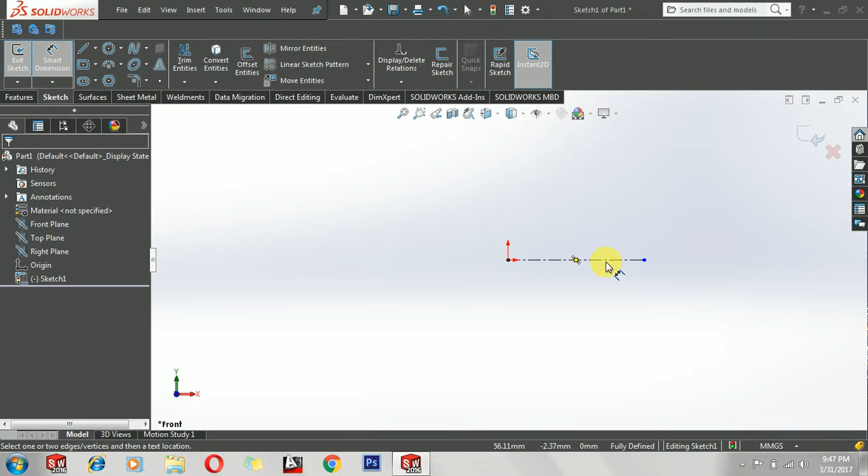फिलहाल वॉल्यूम चेक हो जाएगी। तो माउस के लिए सबसे पहले हम अपनी बेस प्रोफाइल बनाएंगे। बेस प्रोफाइल की बेसिक डायमेंशन हमने ले रखी है। बेस लेंथ 90 मिलीमीटर के अप्रॉक्स है, जो डेल का माउस है उसके हिसाब से। माउस के नीचे के बेस के लिए हम स्प्लाइन कंसीडर कर रहे हैं।

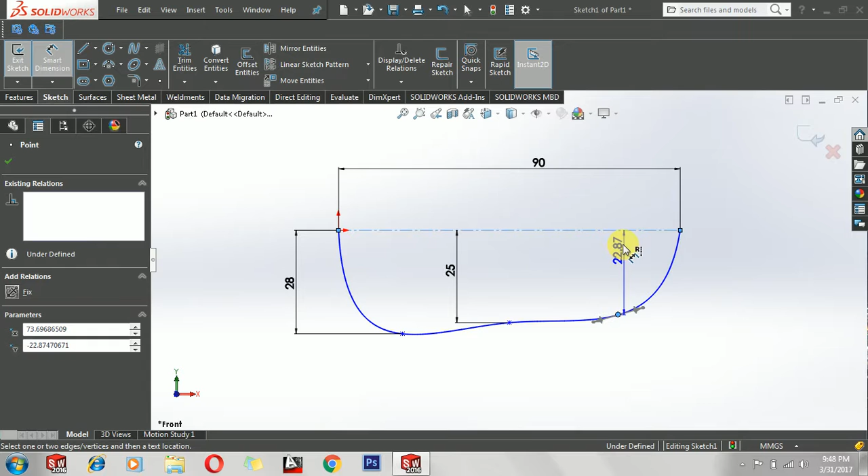स्प्लाइन 5 पॉइंट स्प्लाइन हमने बनाई। स्टार्ट पॉइंट यहाँ फिक्स था, एंड पॉइंट इसके एंड पे फिक्स था। मिड पॉइंट्स को कॉन्फाइन करना है, कंस्ट्रेन करने के लिए डायमेंशनिंग कर रहे हैं। आउटर मैक्सिमम 28 दिया। मिडिल पोर्शन से थोड़ा अंदर की तरफ डिक्लिनेशन है, उसके लिए 25 सेट कर दिया। एक्सटीरियर बिल्कुल अंदर की तरफ डंप हुआ है, वो भी सेट कर दिया।

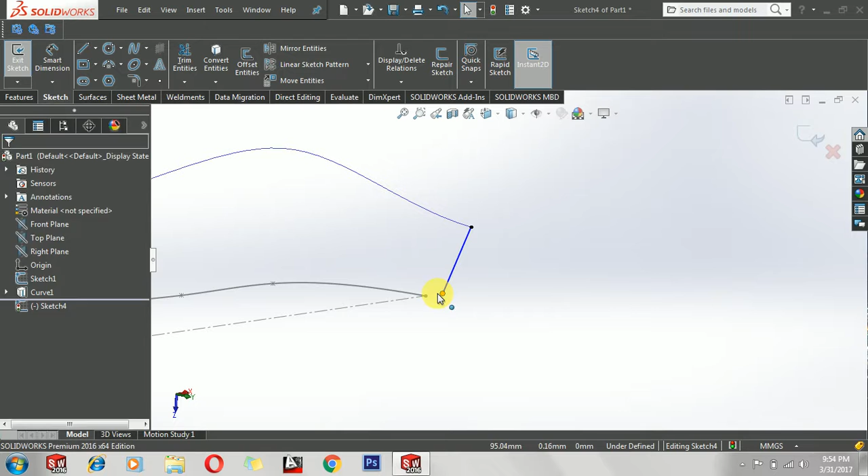अगर हम माउस को देखें, तो हम देख सकते हैं कि ये लाइनें किसी कर्वेचर पर हैं। इसके लिए, मैं इन दोनों लाइनों को प्रेस करके इन्हें अपने डिजायर्ड गाइड कर्व्स में कन्वर्ट कर रहा हूँ।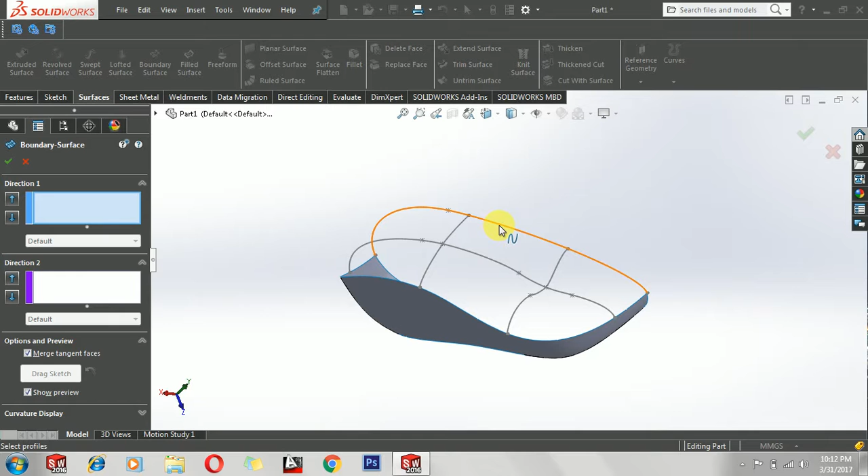I am applying direction 1. This sketch should be compiled with this sketch, and this profile compiled with this profile in the second direction. Trim with direction 1 and trim with direction 2 will result in this kind of shape.

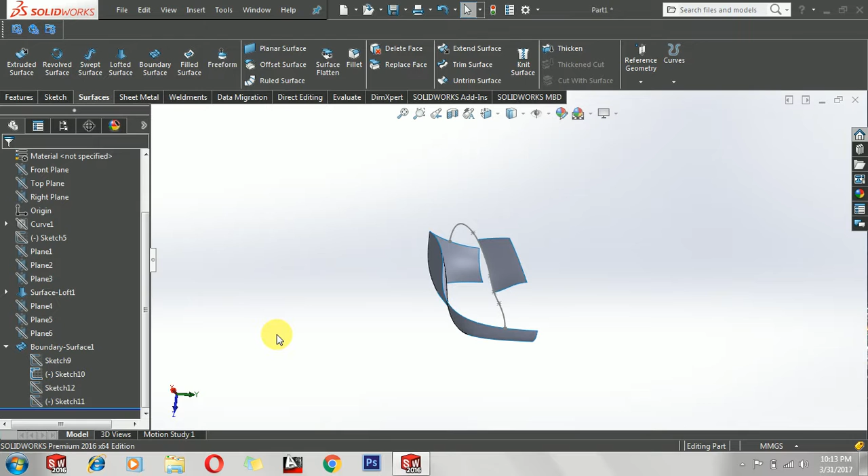Again go to boundary surface and we will apply boundary direction 1 from here to here, and in direction 2 we will apply this as first direction and this as second direction, and along this direction we will apply trim. Then first profile, sketch first, none, okay, none, and none.

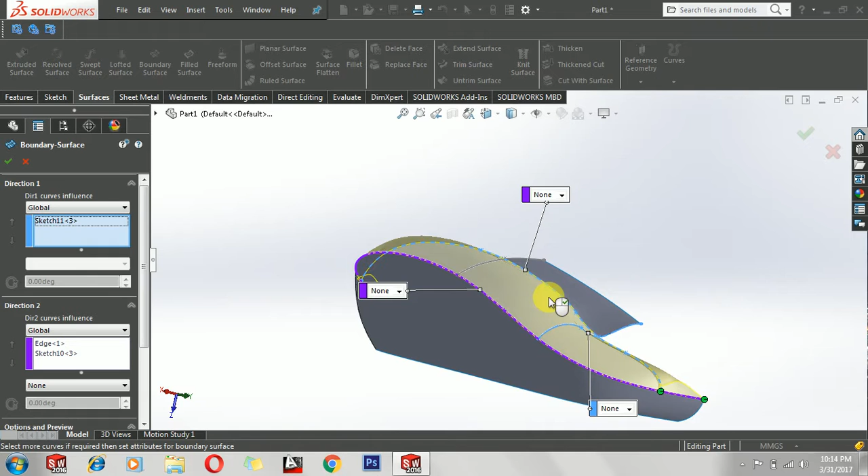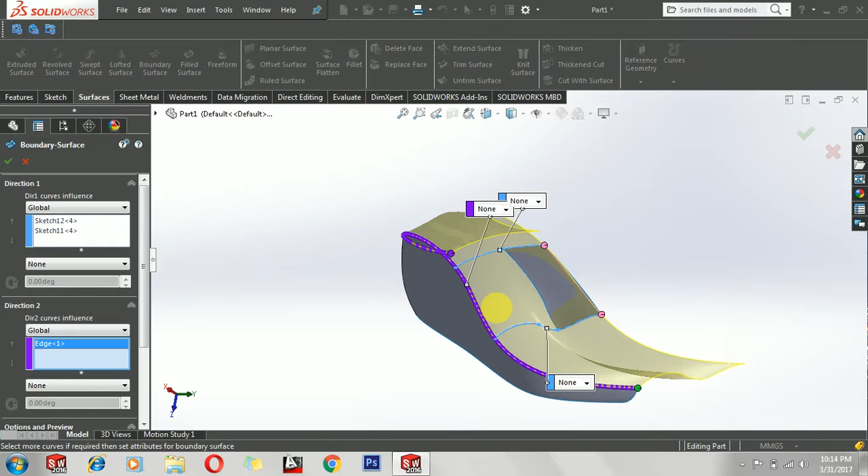Boundary, this to this direction, this and this.

That's perfect, fine. Perfectly fine. Okay.

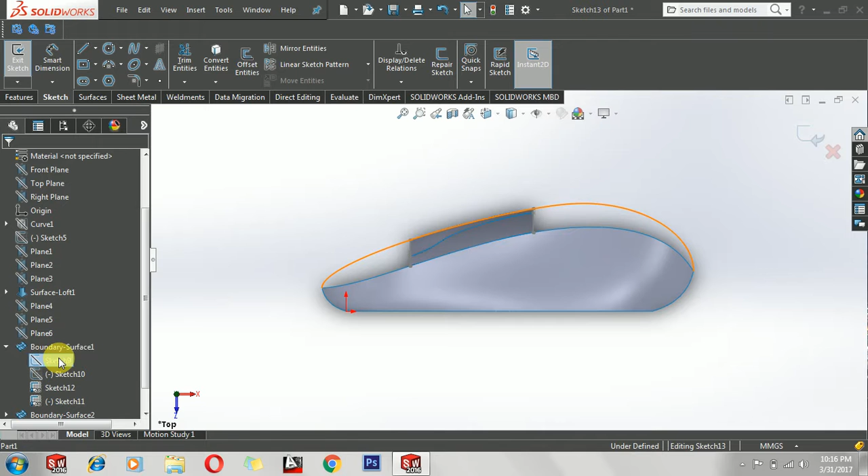Now we'll go to top plane again. Sketch. Then convert the sketch. Go to trim. This. Yes, with this. No. Exit.

Hide it. No. Again, we'll apply boundary from here. Direction 2, this.

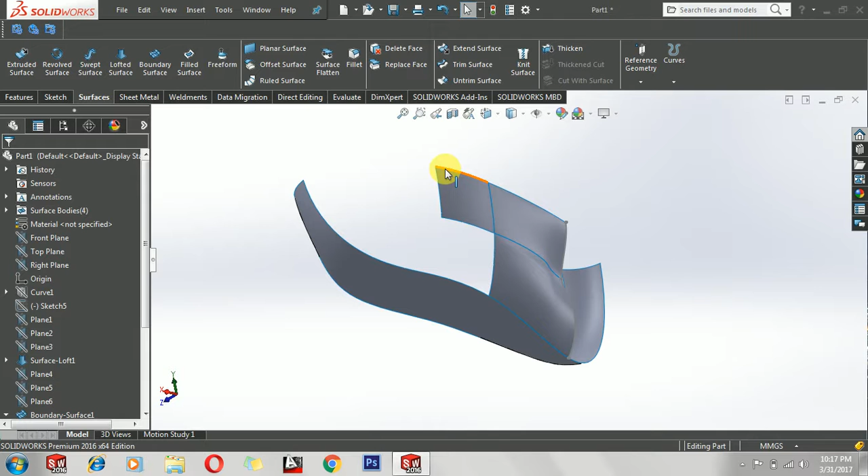No, we need to compile this face. In order to do that, as now here we can see there is a vertex, but now there is no vertex.

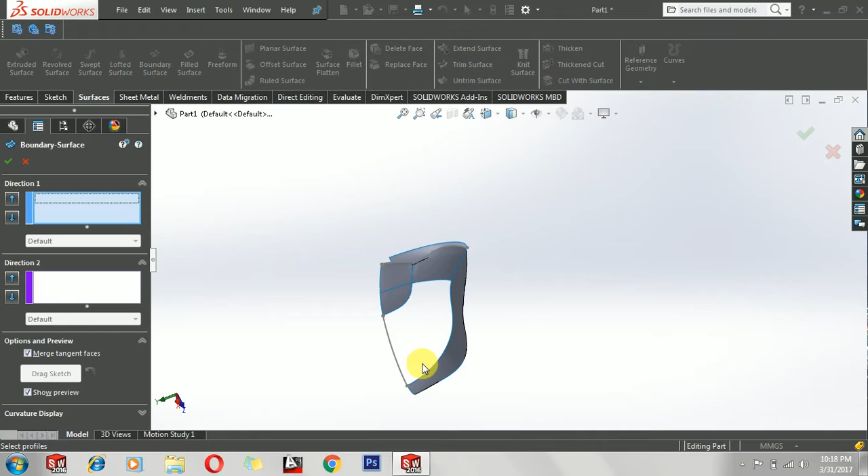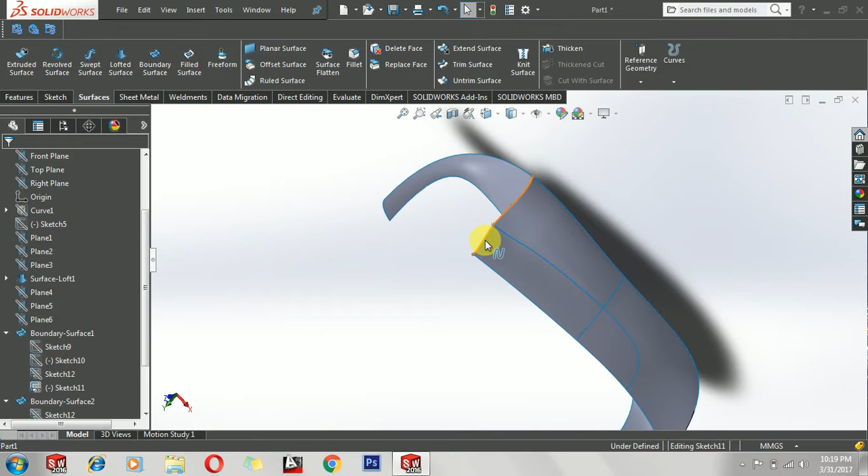Okay, rear profile of mouse is constructed. Now we need to construct the front end of our mouse. In order to do that, what we are going to do is go to front profile and again convert sketch, then trim.

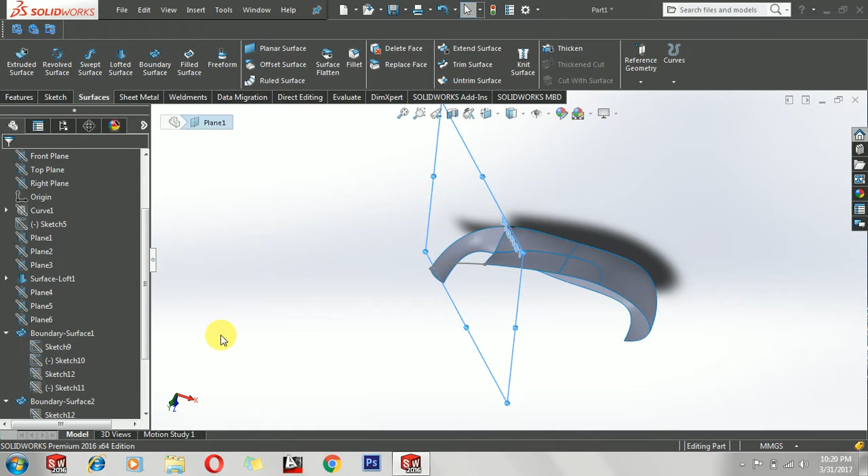Now put a plane for sketch and profile to trim.

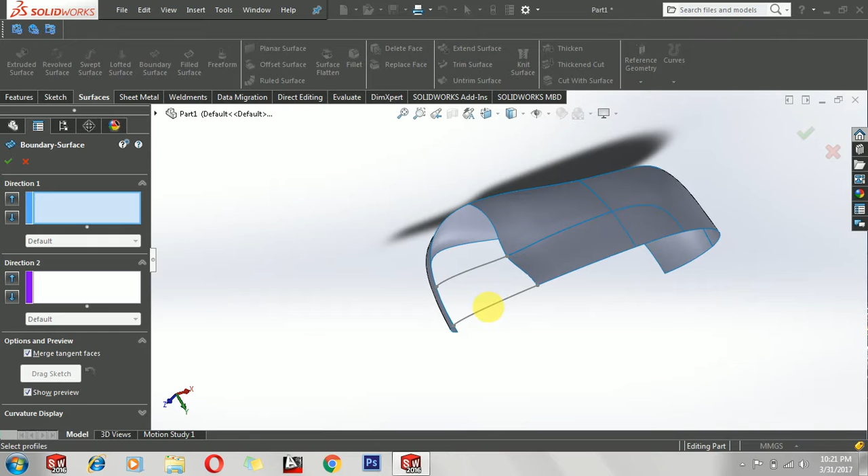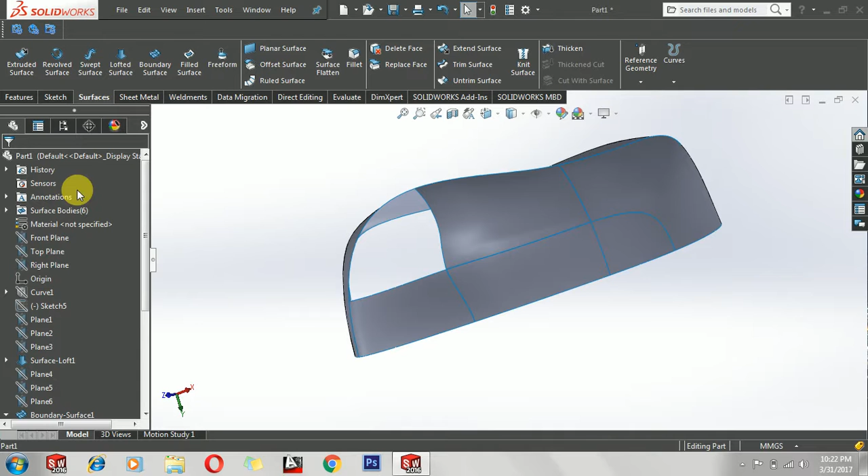Now again we need to fill the area between this, as now we can see that here is a vertex, but for boundary we need to convert this vertex into curvature. In order to do that, what I'm constructing...

Diameter should be approx 15, 20. No.

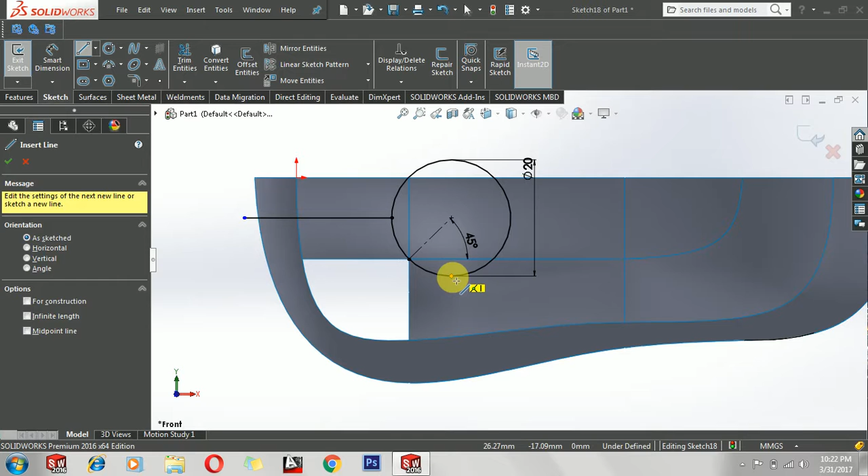No. So we have to trim from this part.

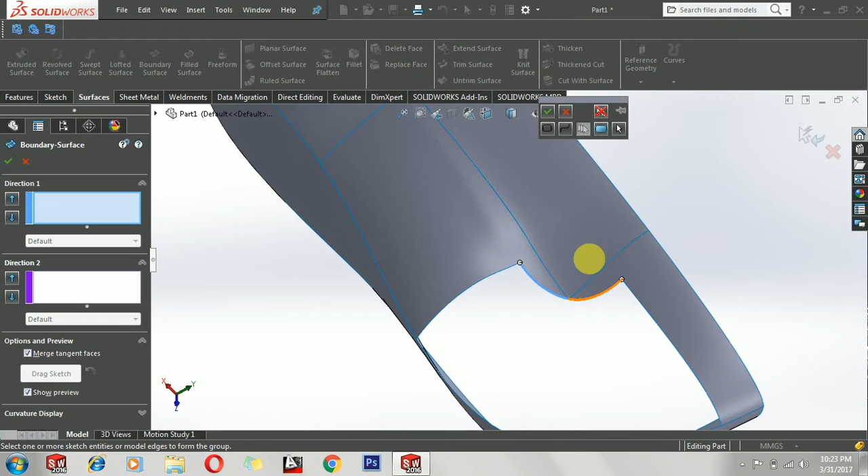Now go to selection manager and go to group selection and then select this whole profile. Okay. Then this profile. Right click. Touch. Click. Flip connector. Now in direction 2, this.

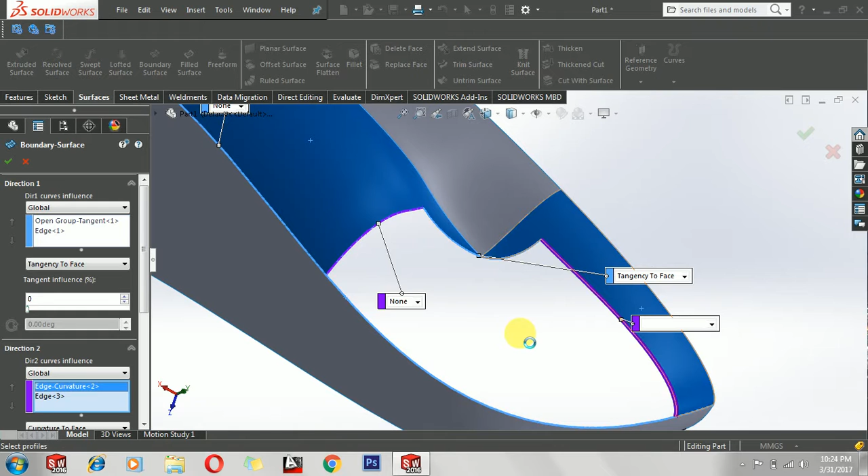Okay, it's compiling now. As you can see, there should be curvature to face. So it should be then tangent to face, curvature to face. This long. Okay.

Now as you can see that the mouse with dent is created nearly.

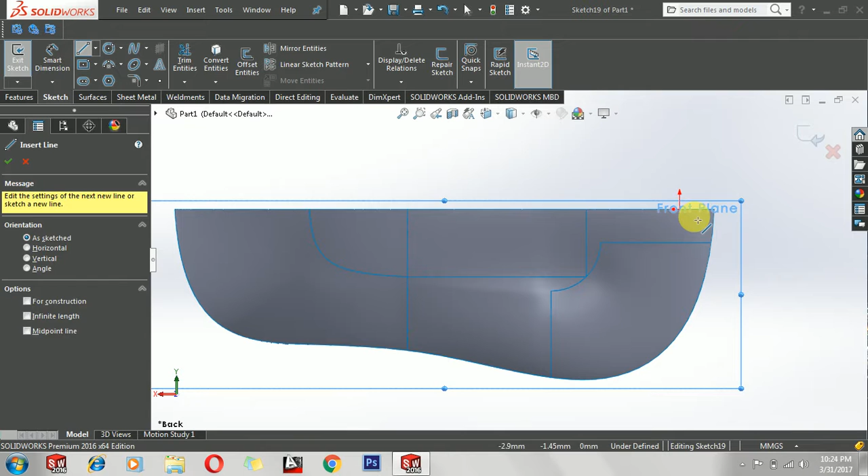Now what we need to do is we need to provide some holes for our scroller so that it can be fit properly. In order to do that, we are doing this.

Coincide. Now gap between these two should be approx 1.15. Length should be about from here to here, 45. Gap should be about 2.5.

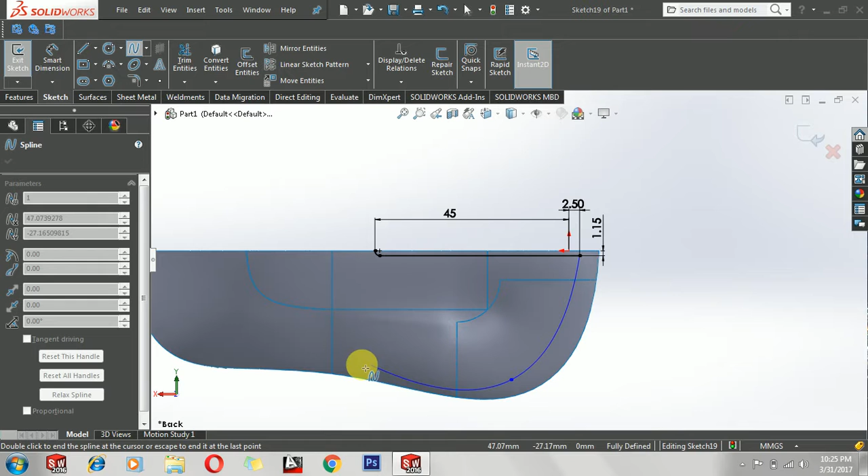Now we'll go to spline, first, second, third.

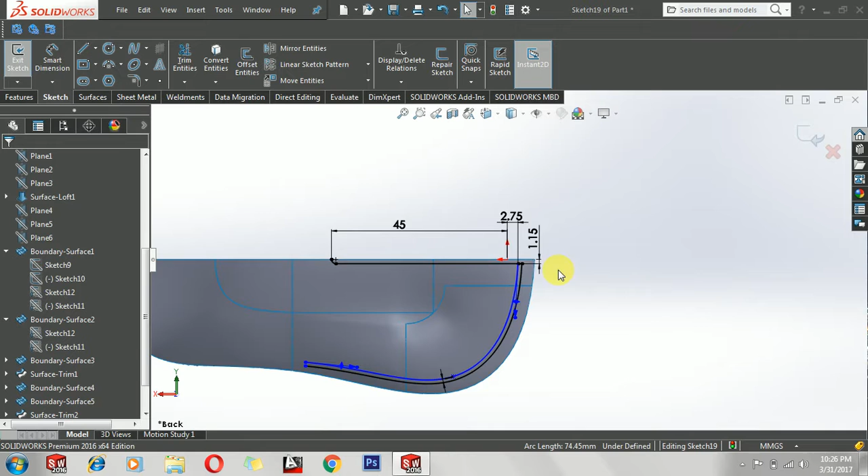Now I'll offset this. Offset chain gap should be near to 1, and then okay, no.

Extend, okay, center line, extend, so okay.

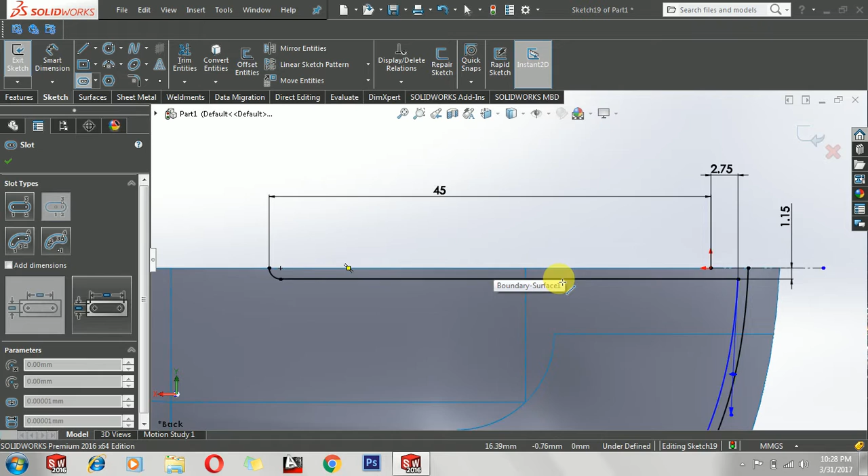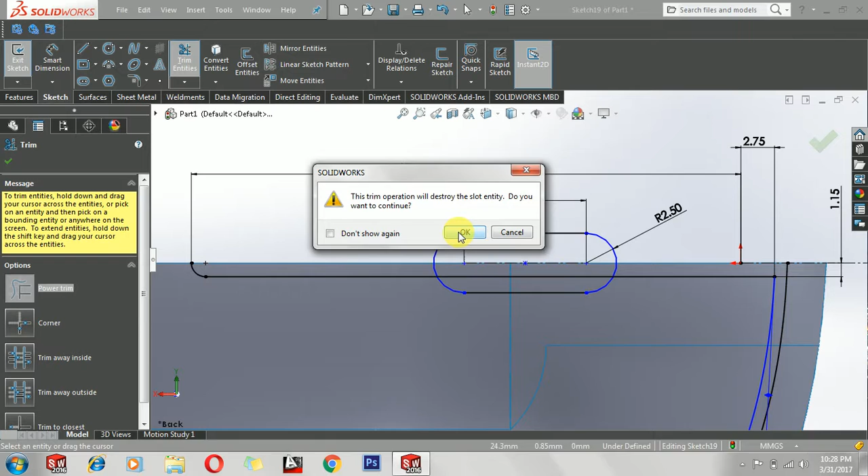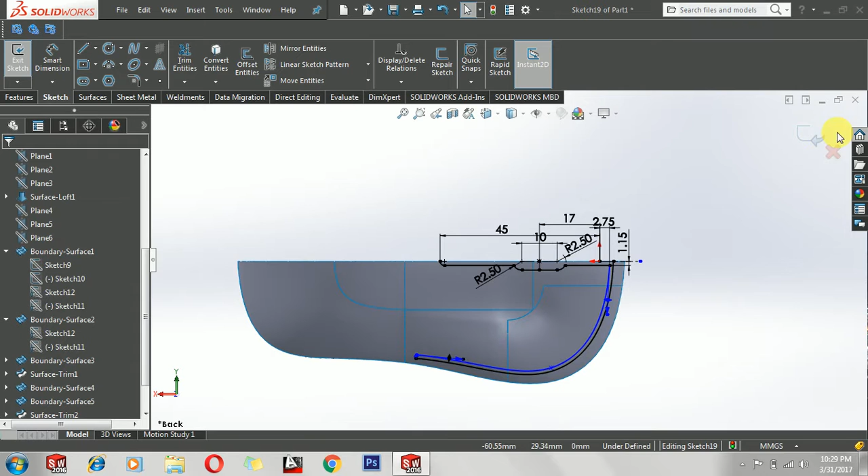2.5, okay, no, and again go to trim, select the remaining surfaces, that's okay.

Now as you can see, no, okay, now as you can see that there are total 9 surface bodies.

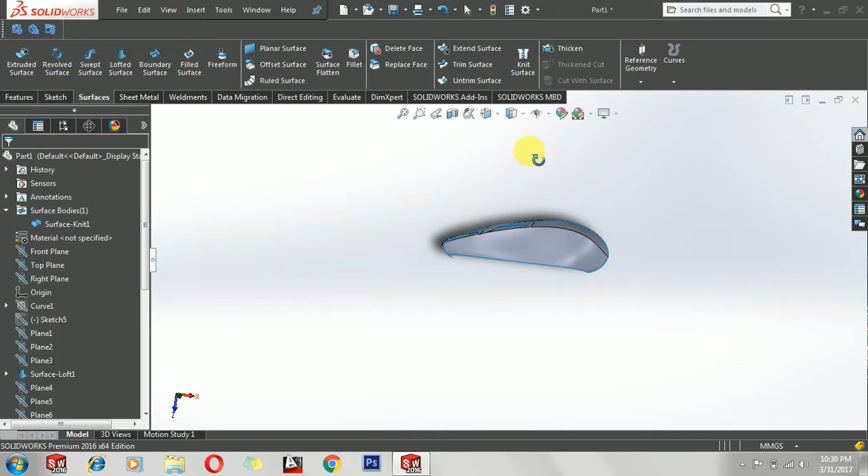In order to combine them into a single body, we need to go to surfaces, knit surface, select the object, and combine it into a single surface body.

Now it's just a half profile. In order to create another profile, we need to go to mirror feature, go to body mirror, select the body, go to face, select top plane, and click OK.

Now there are still 2 bodies left. Next, surfaces. Okay.

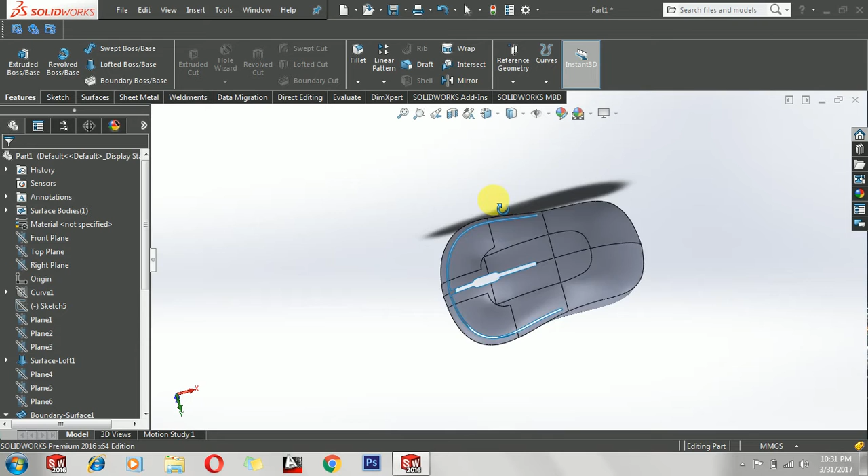Now, mouse is constructed. Now we need to go to surface, then thicken, select the entire body, specify thickness, just one inner, and okay.